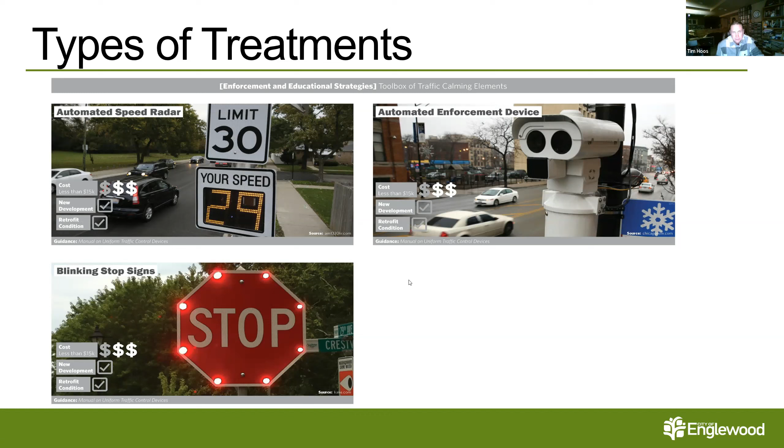We've also got more infrastructure type strategies that go from simple to more complex. We have speed cushions, which are basically a speed bump with a notch cut out—a narrower speed bump so emergency vehicles can get over them without delaying response time. Right now, the city doesn't have any speed bumps; historically, Englewood hasn't allowed speed humps anywhere. So that would be a new strategy if it's something we want to consider—it's an option, but just not something the city has done in past years.

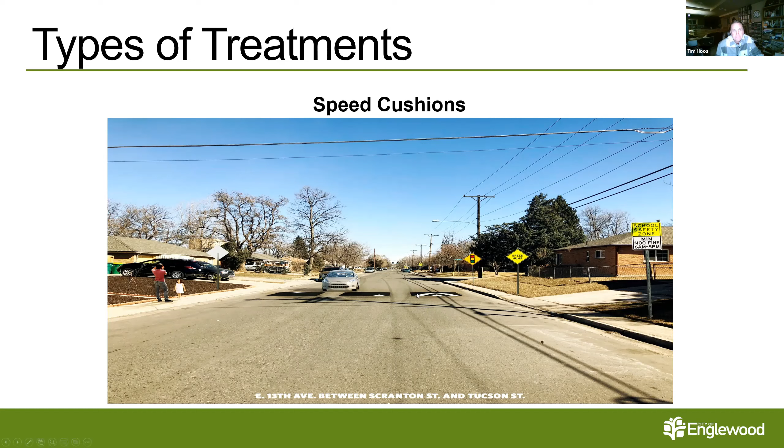Then you've also got pedestrian safety islands and curb extensions. These are installed at crosswalks to narrow the crossing distance for pedestrians, and they also serve to slow down traffic by narrowing the road and making it a bit more difficult to navigate. You've got the bulb-outs on either side of the street and an island in the middle that really narrows the road, slows down traffic, and makes it easier for pedestrians to cross.

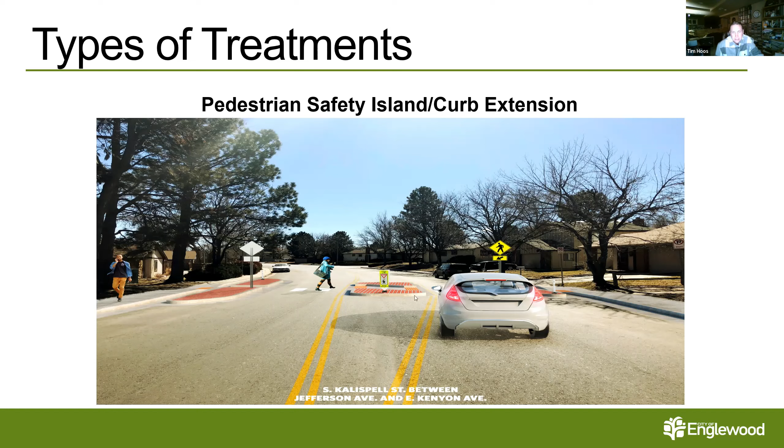The next thing we have is the mini roundabout. We're looking to install a couple of these on the East Dartmouth project we talked about before, at Logan and Downing, the two intersections around Dartmouth. We're still working on the design, so we're hoping to implement a couple of these in the city within the next year or so. The difference with mini roundabouts is that emergency vehicles can drive over them, since they're not big enough for an emergency vehicle to drive around the circle in the middle—so they're designed so emergency vehicles can drive over.

The larger trucks, delivery trucks and things, can still drive right across the top there and get through the intersection. So it's kind of a mini roundabout. It's a little different concept, but it still serves the purpose to calm traffic and keep cars from speeding quite so fast through there. They've got to navigate the roundabout, and it slows them down.

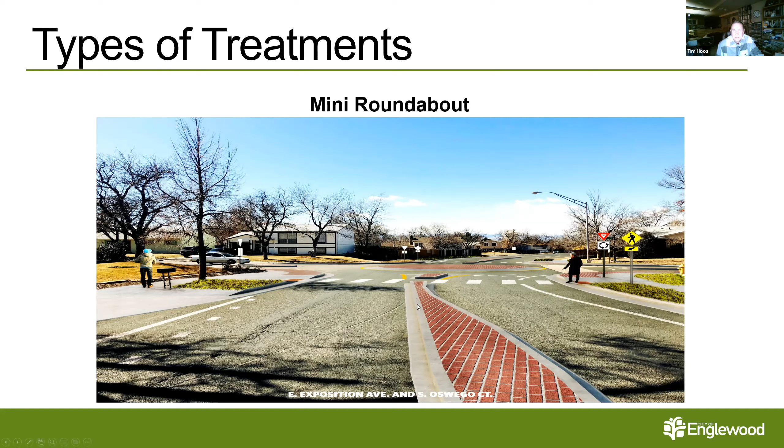So those are the main types of treatments we have, the standard options for traffic calming. I wanted to ask the committee at this point if there are any other types of traffic calming you've seen that we may want to consider for inclusion in the program, something to think about as an option for different situations. Does anybody have any thoughts on anything you've seen that you might want us to look at including in the program?

I don't know, all speak at once now. Come on. Yeah, off the top of my head, I'm trying to think.

I think you covered quite a bit of ground there. But I'm really thinking about if there are other applications here that possibly I've seen.

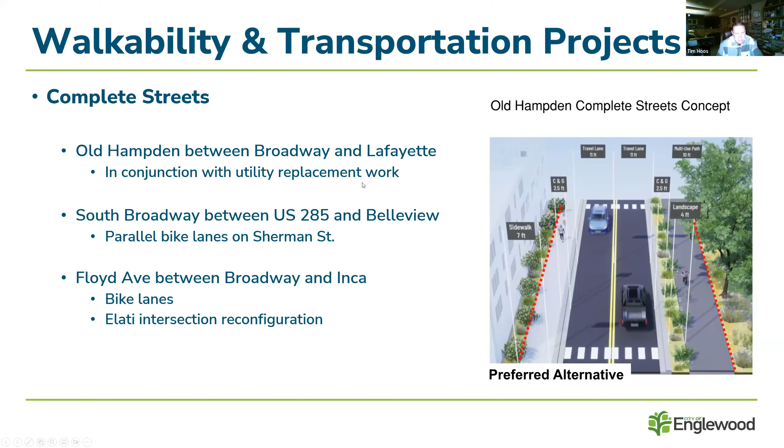And then at the Elati intersection, we'll reconfigure that a little bit to make it more friendly for bikes and peds to get through there. Right now it's kind of offset. My next slide shows the design for the Elati intersection, how we're going to try to line up the bike lane there.

So it kind of forces the bikes into a certain path, so they're not mixing with the vehicles as much. It's really the islands there that are going to be reconfigured to make it clearer for the bikes and peds to get through the intersection, so it's not as confusing and we have a defined path for them.

So that work is a little bit delayed. The Floyd and Elati improvements were a CDOT funded project as well that we have a grant for, and we have to get CDOT's approval to award the construction contract.

It's kind of a unique situation there. The low bidder on the contract actually didn't meet the minimum disadvantaged business percentage they needed to have for their bid. So we had to go to the next lowest bidder, and we're working with them now to make sure they meet all of CDOT's requirements to award a contract.

So it's put us a little behind, but we're still hoping probably late spring, early summer, we can get that approved and get the contract awarded to build that as well. That'll match into the new bike lane and the overlay going all the way from Broadway to Inca.

So with that, I'll pause here. Any questions on any of those projects, or anything come to mind that you want to ask about?

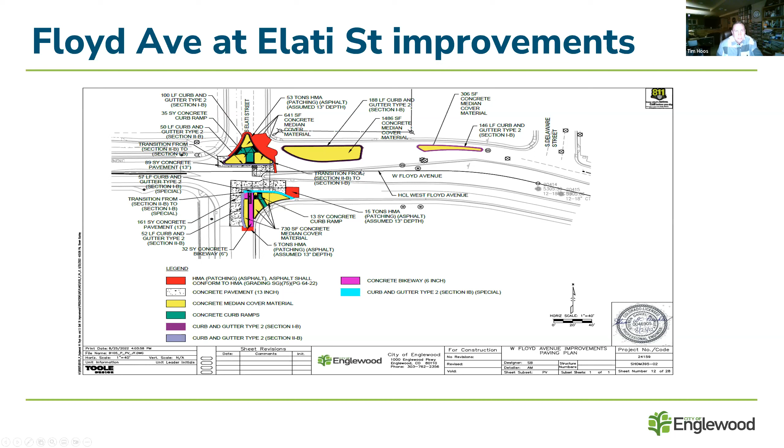Go ahead. Oh, go ahead, Chair Knaddison. No, I didn't have anything. I'm unmuting, calling you. Go.

Okay, I did have a question. I was looking at this slide and wasn't sure how the bikes go through. I walk and run that path quite a bit, and I know that's a more narrow road anyways, a very strict 2-lane road between Elati and Inca. This Elati intersection is always a fun one, so I was curious how the bikes go through each way. If you don't mind showing, that'd be super helpful.

Are you able to see my cursor there? Can you see me moving the cursor around? Yes, I can kind of guide you through there.

The bike lanes will be along the north here. These islands are intended to have a little refuge for the bikes, to separate them from the vehicles. They'll come around this north side here, then come through the island here as planned, and rejoin over on this side. So the bikes will need to come through the island east-west as well as north-south. This north-south piece is the bike route there; the bikes come through the island and head north. That gives them a defined path to get through there, rather than just wandering through the intersection.

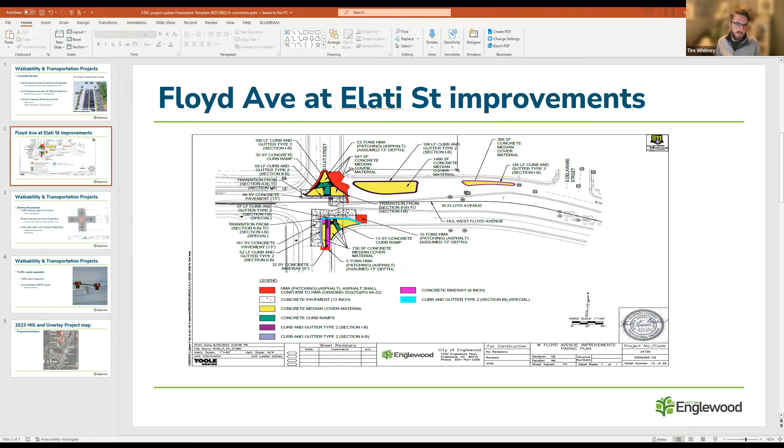That took me a little while too to figure out when they were designing that, how it was all coming together. We had to blow up that island a little bit to understand the pathway there, but it'll be a nice, safe refuge with curbs and stuff to protect the bikes and peds getting through the intersection, keeping them separated from the vehicles.

Go ahead, Member Sarno. Just a general comment that I think these projects you outlined, Deputy Director Hoos, have been discussed through ETAC going back for quite a bit, and so I completely support them. I think they're long overdue and quite a benefit to the community.

I don't know, Chair Knaddison, do you recall? I think this has been at least a year or two that we've discussed these projects, so I'm glad it's getting closer and closer to coming to fruition.

Yeah, for sure, agreed. I'm always excited to see the progress on these things. So that's it, just a general comment regarding advancing these projects. I'm very happy to see that.

Great, yeah, it's a nice feeling to see them done as well. It takes a long time to put these things together. They look simple when you get them on paper, but it's definitely a process, especially with that CDOT local agency process for the grant funding. There's a lot of scrutiny and review, so it's an even better feeling when we get through those and know we've made it through and are actually ready to build things. We're excited about that.

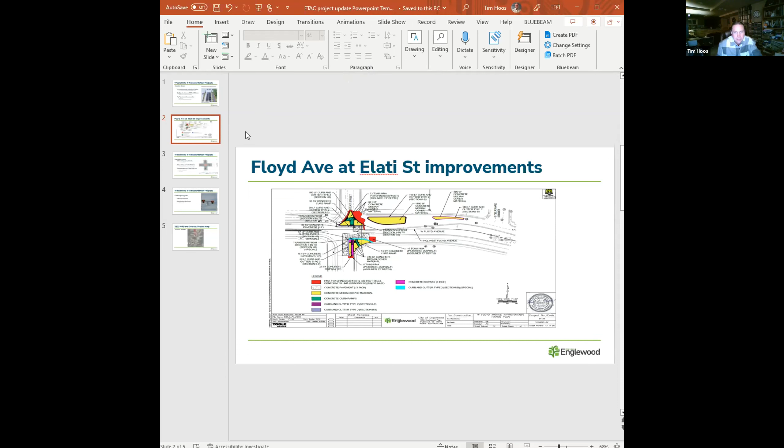We'll keep moving ahead, and I'll talk about a few more projects here, a couple more anyway. Are there any more questions or anything before I move on?

I just have one more thing there, Deputy Director. Since you mentioned CDOT local agency, the lowest bidder did not meet the DBE goals, correct? That's what you had mentioned.

That's correct. They didn't meet it, so CDOT wouldn't allow us to award it to them because there's a minimum DBE participation goal on the contract, right there in the bid document. I'm not sure why the contractor didn't see that, but they appealed the decision. It took a while since they appealed it, and CDOT still denied it. So we have to move on to the next bidder, which is about another $40,000. Unfortunately it's going to cost a little more. The low bidder was low, but he didn't meet the requirements, so we can't award it to him.

Yeah, clearly if they didn't meet that requirement, then that's exactly it. So I fully understand that those local agency projects add another dimension, another layer of complexity and requirements and all that. But totally understood. Thank you.

All right, well I'll move on. I made a whole slide about the Dartmouth projects because we've got 3 different projects going on Dartmouth right now, and I'll update you on where those are all at and how things are coming along.

We talked a little bit already about the traffic calming between Logan and University, the mini roundabouts, where we were hoping to do Logan, Clarkson, and Downing with the mini roundabout treatment, but the budget kind of slapped us in the face, and we're down to just Logan and Downing right now. We're trying to fit that in.

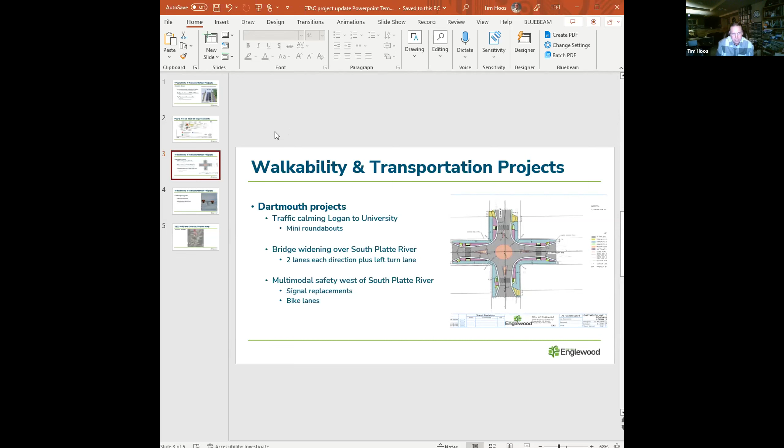We're working on a project to replace some of the signal equipment and make sure we don't have any corroded poles or anything like that. We're working on that, and that's going to come together. Hopefully this year we'll do some of that. It's not a big project, but definitely an important one to make sure our signals stay structurally sound and functioning.

That'll be a lot safer for that crosswalk on Broadway, where the rapid flashing beacon isn't quite having the impact we hoped. Vehicles don't seem to stop as much at that, so we're hoping this Hawk signal will be more of a defined signal there and make people stop, so it's safer to cross Broadway and we don't have potential issues with pedestrian and vehicle conflicts. So that's one we've got coming up pretty soon.

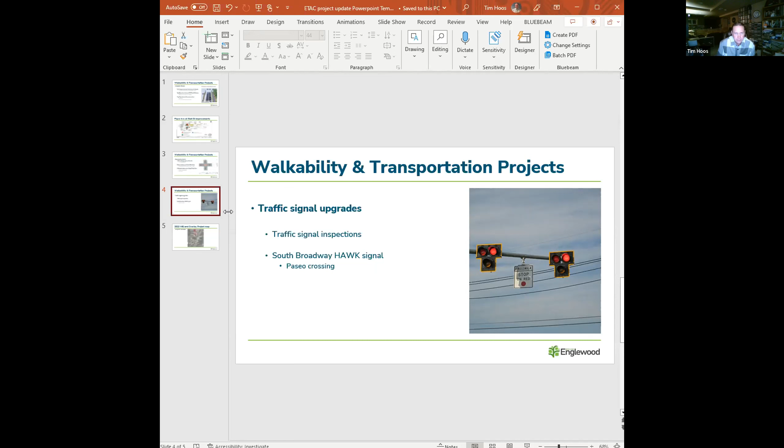But the other two exciting pieces are Broadway, scheduled this year too. Broadway is one of our lowest rated streets for pavement condition index. We've got Broadway between Yale and Dartmouth we're going to resurface this year, as well as the south end of Broadway near the far north and far south boundaries of the city. We did a little bit of Broadway last year south of Bellevue, and we're going to continue all the way to the city boundary and finish off that south end by the car dealers down there by John Elway Chevrolet. That's the last bit we need to do to finish the south end of Broadway, and then we get this north end.

The other plan is once we get the South Broadway complete street project done between 285 and Bellevue, we've allocated funding—we think we've got enough to pave this whole segment as well once we get the ADA improvements done, plus the bus stop improvements and bus pads. We'll be able to resurface that whole segment and really make it look nice. It'll be a multimodal corridor with upgraded ramps, pedestrian facilities, and bus stops. It's going to look really good when we're done. We're excited to be moving ahead on that—it's a nice improvement. It's all tying together very well, how we can get the complete street and the resurfacing done. We're excited we can bring that all together.

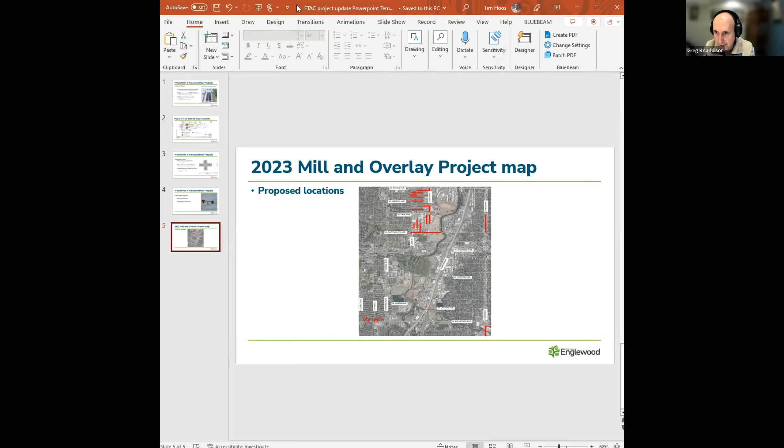Alrighty, seeing none, the next item on the agenda is Englewood Trolley Route plans. That was something that Member Lewis had requested get placed on the agenda. Since he's not here tonight, I think we should probably skip it. I don't know if anybody wants to talk about it, we certainly can.

Yeah, we've actually got a response for that if we want to read it. We talked to community development about that. It's not a great response, but basically there's no funding to expand the route. We did inquire about that, and it sounds like RTD doesn't have any additional funding to help us out with that one either right now. So we're kind of in a holding pattern there as well. Let me look up the quick response here and let you know what we said. But we did get some feedback anyway. Let's see what's here. I think just to give some more context before the response.

Member Lewis got a request, I think, from someone in the city who is interested in making sure that nonprofits and the people who are going to visit those nonprofits are able to get there reasonably well. I think it was more of a north-south mode of travel. So like if you can get east-west on the trolley, right? But what if you need to go north-south? Well, there is the RTD on Broadway, but that might not be accessible to everybody, financially accessible. So they were sort of curious about the possibility of expanding the route. I may have missed some details or misstated, but that's what I understood.